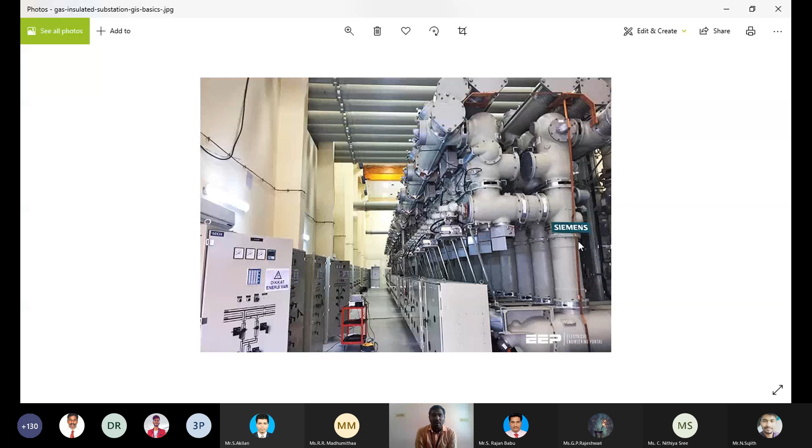This is one 230 kV GIS substation, that is gas insulated switchgear. Here all the equipment are gas insulated, nothing but SF6 gas. We can see here it is very compact. And you can see here the AIS substation; it requires a large amount of area.

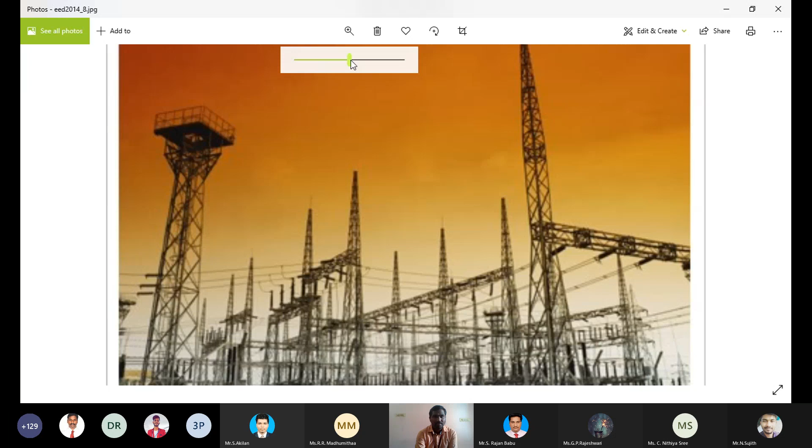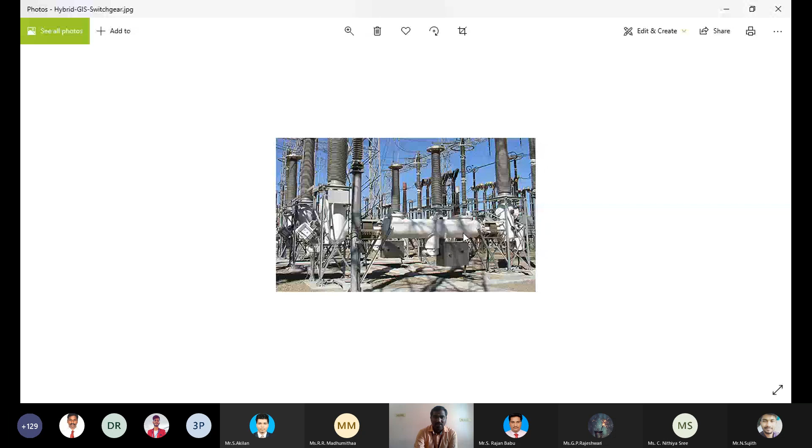This is a hybrid substation. It is like the model of AIS, but incorporated with gas insulated switchgear. This is the circuit breaker, and these are all the supporting insulators, and this one is a lightning arrestor. This is also a lightning arrestor of an air insulated substation. Here, this is the corona ring or gradient ring.

What is the purpose of this lightning arrestor? Can anyone explain? Okay. Under normal voltage condition or normal current condition, it acts like an insulating medium. It will not conduct. Whenever there is a high voltage, the silicon carbide inside becomes a conducting medium, thereby providing the path for high voltage. And this corona ring is to maintain the voltage stress evenly on the capacitor stacks.

There are so many equipments in a substation, like transformers, generators, transmission lines, bus bars, capacitor banks, reactors, and circuit breakers. These are the equipments to be protected. For protecting these equipments, we use current transformers, potential transformers, capacitor voltage transformers - these are all instrument transformers just for measuring purpose. And then circuit breaker, isolator, protective relays, LAs meaning lightning arresters, and fuses.

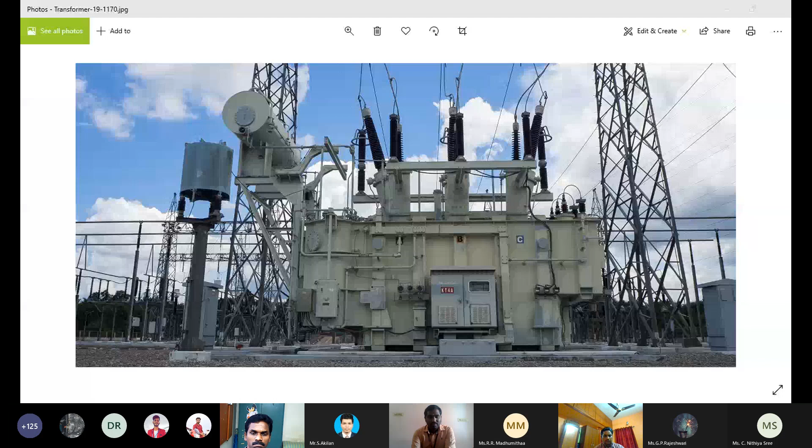You see, this is the Buchholz relay.

This is Buchholz relay, which is connected between the conservator tank and the main tank. Here we can see the oil gauge. We can see whether the oil is flowing through it or not.

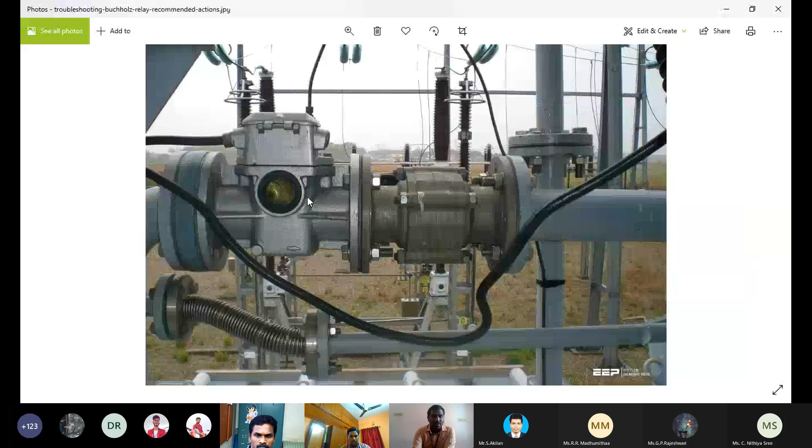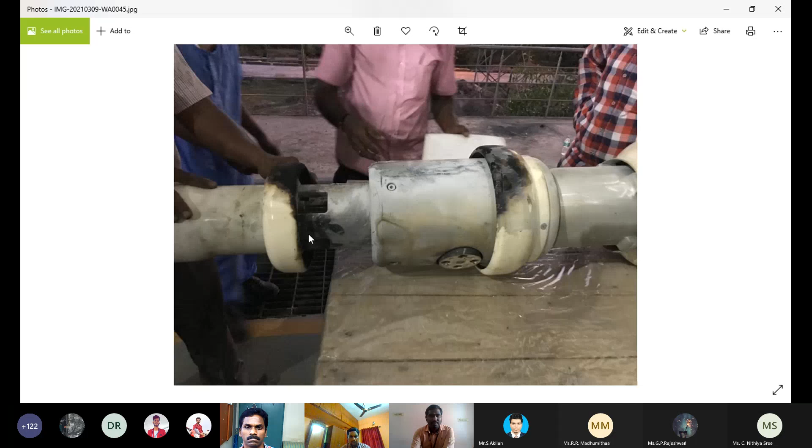This is a circuit breaker, a faulty circuit breaker. Here we can see the oxidation of this circuit breaker.

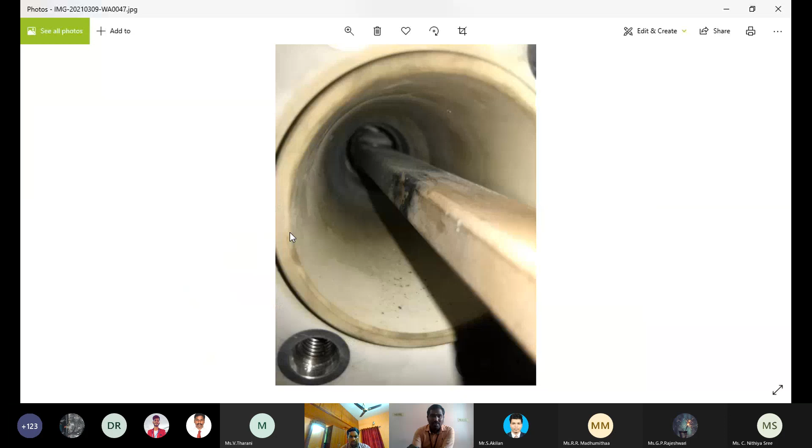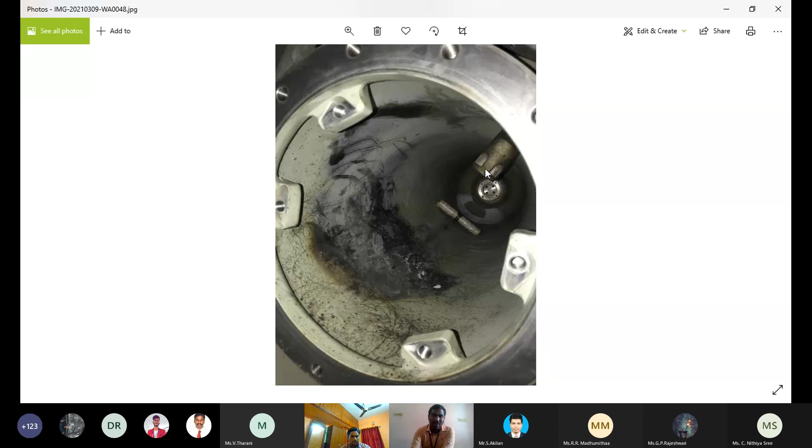This is a gas insulated circuit breaker. These gaps are filled by SF6 gas. Here it is the solid rod for movement of the contacts.

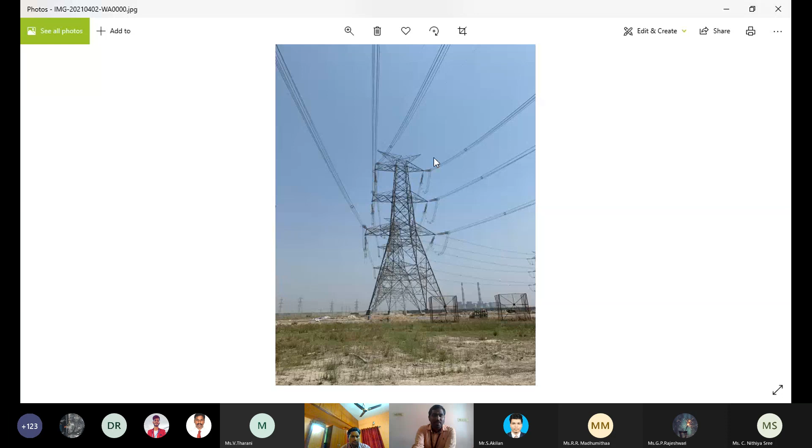Here, this is the wave trap. As I already mentioned, this is the series reactor, which allows only power frequency into the substation and also suppresses the high frequencies.

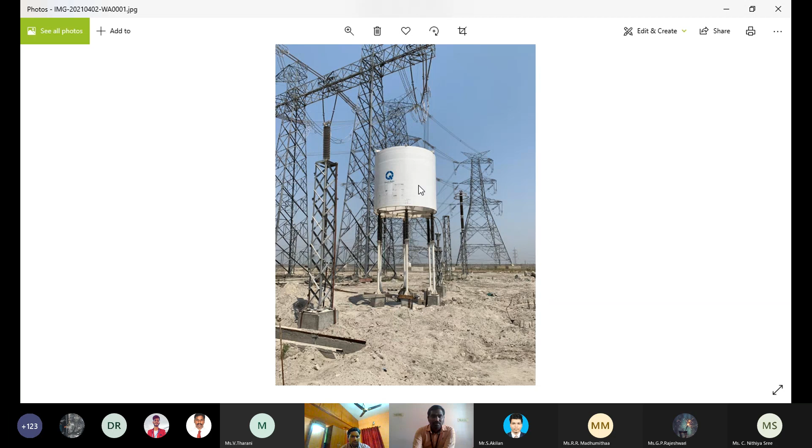This is the arrangement of gas insulated switchgear. At the bottom, you can see the circuit breaker for all three phases horizontally. And to the top of the circuit breaker, you can see the current transformer.

It is also like a normal transformer. It is used to measure the current because on the transmission line, depending upon the load, the current may vary. For example, if it is 765 kV, the current may vary between 1000 amps to 3000 amps. So we don't have any measuring instrument to measure such high current, so for measuring purpose we are using the current transformer. This current transformer will convert the 3000 amps current into 1 amp.

And then there is a bus formation here. This is double bus circuit. There are two three-phase buses.

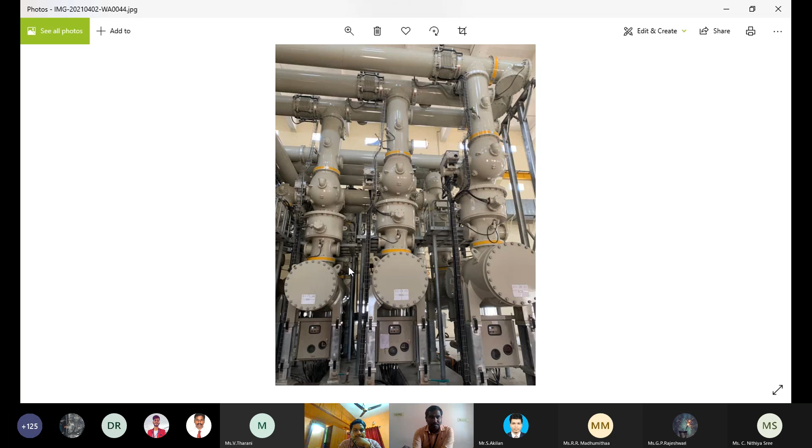This is called gas insulated busbar, that is GIB. That is nothing but interconnection between GIS and AIS. Because transformers are outdoor equipment, whereas indoor is GIS, so we have to connect this outdoor equipment to indoor equipment. For that, this GIB is used. It is nothing but the interconnection.

Here, this is the capacitive voltage transformer, which is used to measure the line voltage. We can also use potential transformer for voltage measurement.

Here, there is a disconnector switch called isolator to isolate the line from the bus. Here we can see visibly the two buses. Circuit breaker is used to connect these two buses.

This is local control cubicle. We can control the circuit breaker from here. We can open, close the circuit breaker. We can open, close the isolator, earth switch, all from here.

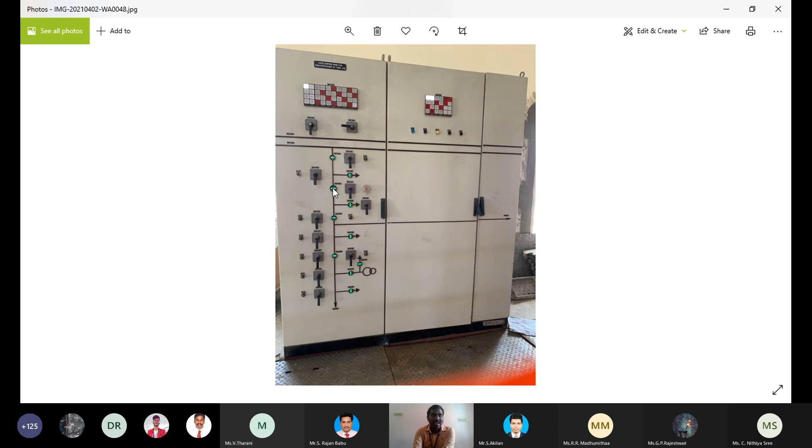You can know the status of the circuit breaker using the semaphore. This green light indicates all the switches are in open condition. When we close using that TNC switch, trip and close switch, the semaphore LED will glow in red color, so we can identify that the breaker is in closed condition.

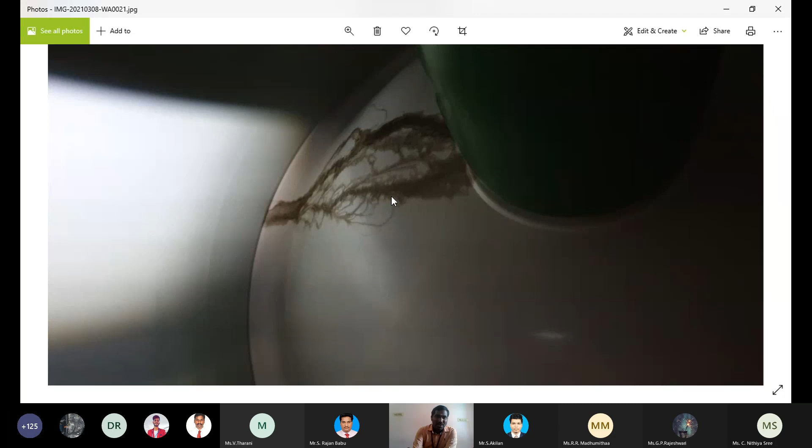This is called treeing of an insulator. While we are injecting 765 kV as a high voltage test for a new substation, the insulator is so weak, so this treeing effect is observed there.

The entire power system is subdivided into sections like generator protection section, transformer protection section, line protection section, and busbar protection section.

So the common protection philosophy is that the faulty portion should be isolated and the healthy portion should not be disturbed. To maintain this philosophy, we are using circuit breakers and isolators.

As I already mentioned, the entire power system is subdivided into different zones. Using these zones, we can eliminate the fault in a particular zone so that the other healthy part is intact.